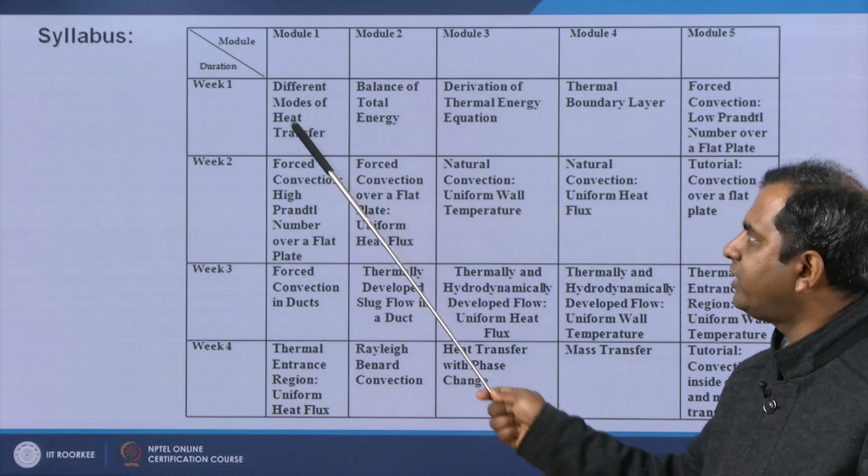Then immediately in the next lecture I will discuss how energy can be balanced, as it is convective heat transfer, so energy is very important. I will show you how energy balance can be done and what is the governing equation for energy conservation. Then, in week 1 module 3, I will show you how the energy equation can be written in different forms, especially CP form, CV form, all these specific heat forms.

Then in this week we will give you the idea of thermal boundary layer. This is nothing but flow over a flat plate, and if the plate has a higher temperature compared to the free stream temperature of the incoming flow, then we will have a concept of boundary layer development, just like the hydrodynamic boundary layer. This boundary layer we will call the thermal boundary layer, discussed in module 4.

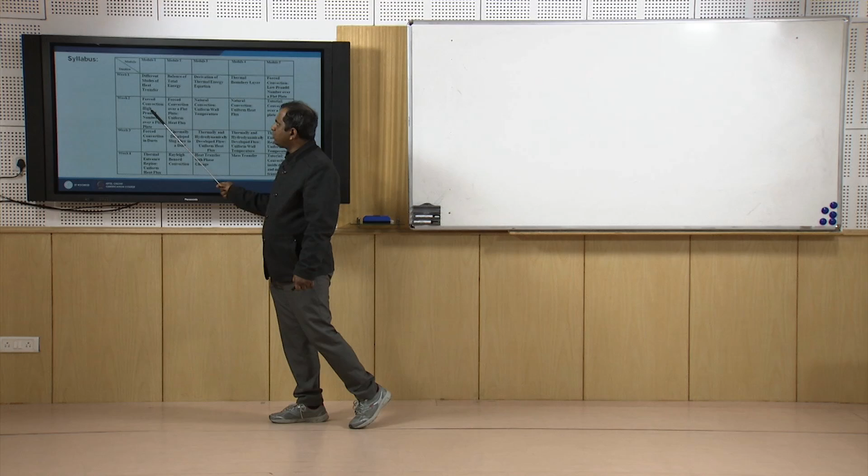In this week's last module we will keep forced convection, with predominant flow over a flat plate. In this lecture we will discuss the extreme limit of low Prandtl number. Immediately in the next lecture, week 2 module 1, we will discuss the high Prandtl number extent. These two will discuss more or less the same phenomenon, but at two different extents.

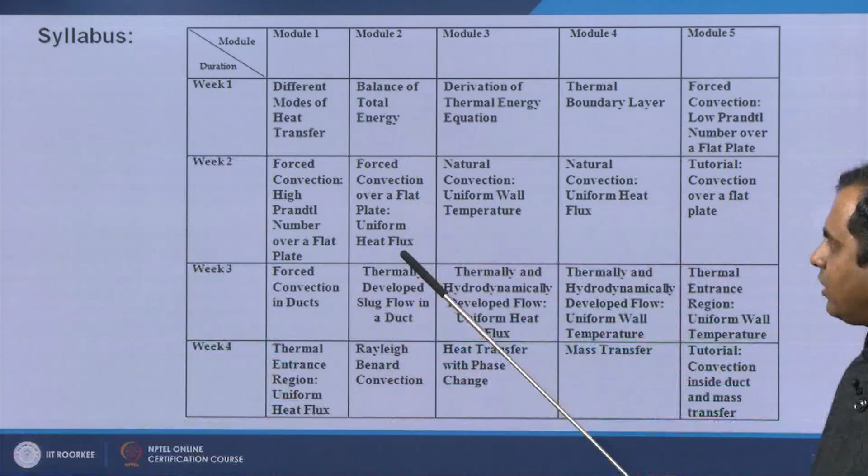Then we will go to another analogous case, uniform heat flux of the plate. In the previous two cases we had constant temperature, but here we will have uniform heat flux supplied by the plate. We will see this case coming up.

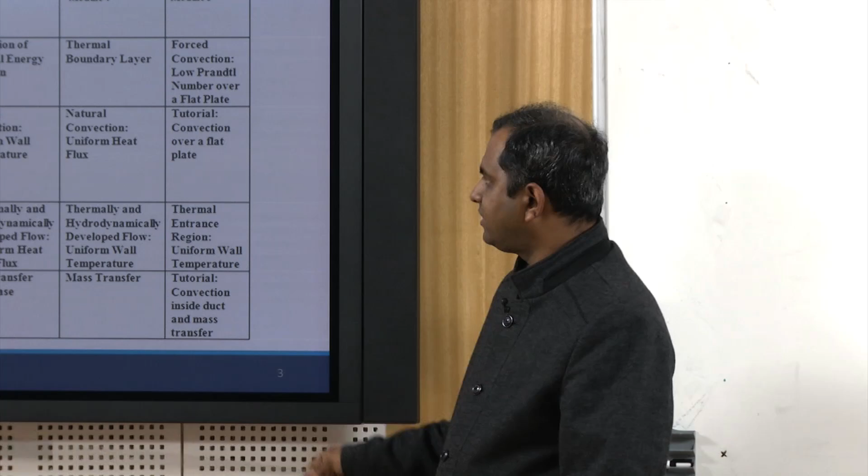In the second week we will briefly see what is natural convection, and we will see two different extents of natural convection: uniform wall temperature and uniform heat flux. At the end of this week we will do some tutorials on convection over a flat plate, covering numerical problems from all these lectures.

In week 3 we will move towards flow inside a channel, an internal flow situation, unlike the previous flow on a flat plate which was external flow. Here we will see forced convection inside a duct, internal flow. Then in that week we will continue with thermally developed slug flow, discussing what slug flow is and what thermal development means. This will be covered in the second module of week 3.

In the third module we will see thermally and hydrodynamically developed flow, considering first the uniform heat flux case in module 3, and in module 4 the uniform wall temperature case. At the end of week 3, in module 5, we will see another extent called the thermal entrance region.

This is the beginning section of the duct for convective heat transfer. We will define what the entrance region is, and then learn the governing equations and different non-dimensional numbers for the uniform wall temperature case.

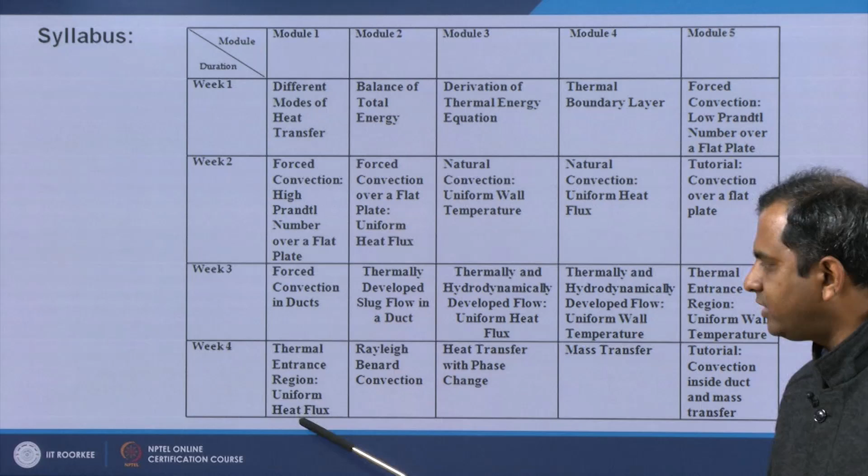In the last week, at the beginning, we will continue and see the same case, thermal entrance region, but for the uniform heat flux case.

In this week's second module, we will see a special type of convection called Rayleigh-Bénard convection. Here we will see that when we have two parallel plates, how convection cells form in between, and how that can be analyzed using the governing equations and boundary conditions respectively.

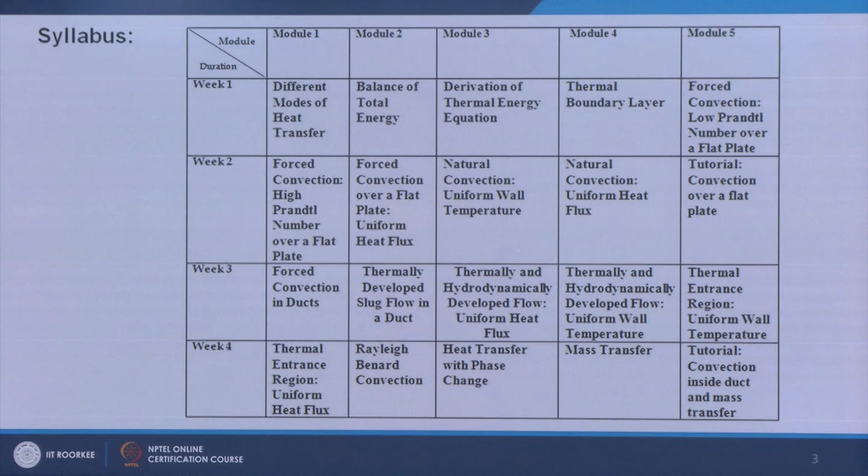Then we will see two special cases related to convection. The first is heat transfer with phase change. I will show you how phase change can be linked up with convection. Phase change here means only boiling and condensation; in other cases convection will not be that much involved.

We will see boiling and condensation cases, and then mass transfer, which is more or less analogous to convective heat transfer. This lecture will be very much related to chemical engineering students.

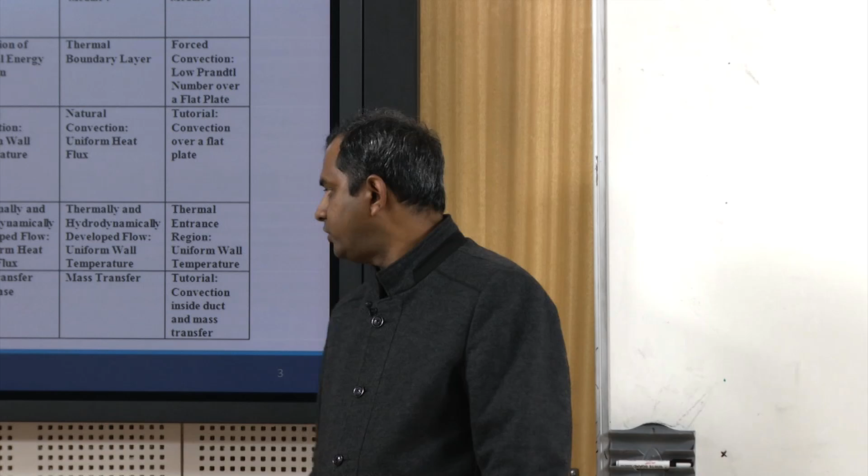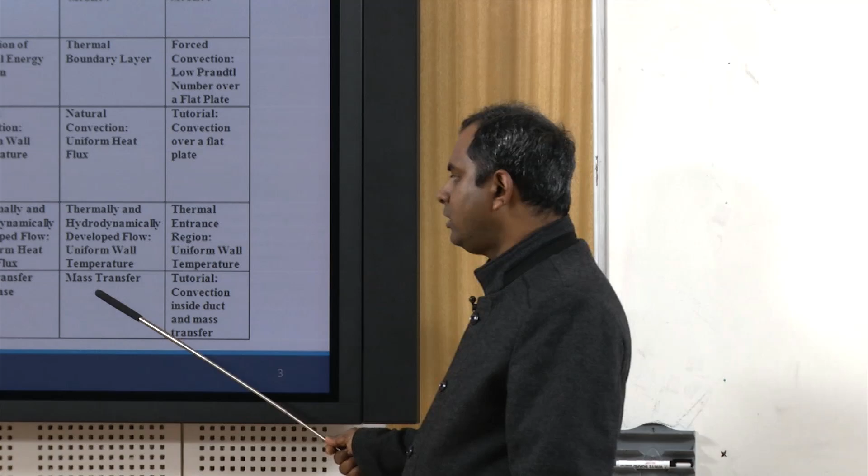At the end of this lecture we will do some tutorials again, specially concentrating on convection inside a duct and some problems on mass transfer. With this, I will be ending this course.

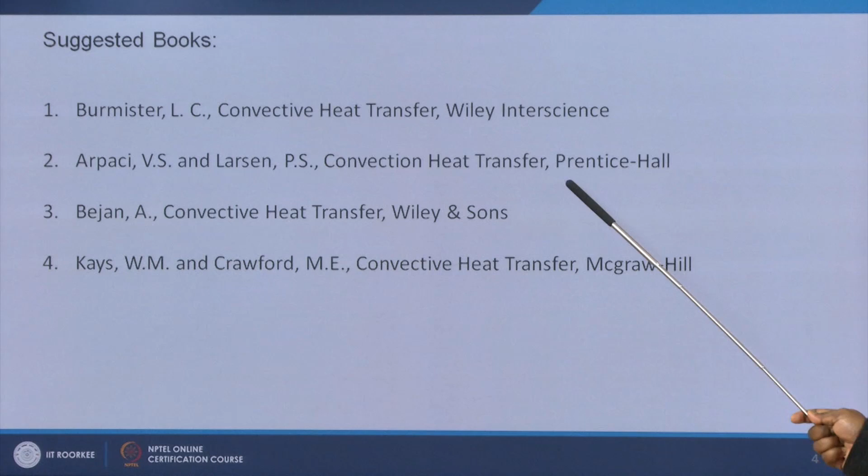A very good book is by Burmister, L.C. Burmister, titled Convective Heat Transfer, published by Wiley InterScience. We have some more books: one is by Arpaci and Larsen, V.S. Arpaci and P.S. Larsen, titled Convection Heat Transfer, available with Prentice Hall publisher. Then there's also a very good book by Adrian Bejan, Convective Heat Transfer, published by Wiley and Sons.

You can also refer to Kays and Crawford, W.M. Kays and M.E. Crawford, once again titled Convective Heat Transfer, available with McGraw-Hill publisher. All these books are very nice; if you want, you can consult these books along with this course.

Let me go to the outline of what we are going to discuss in this lecture. We will learn about the basics and applications of heat transfer. As we are beginning the course, we have to learn the very preliminary basics and applications. Then we will go for classification of heat transfer and learn the different modes, as well as discuss the governing laws.

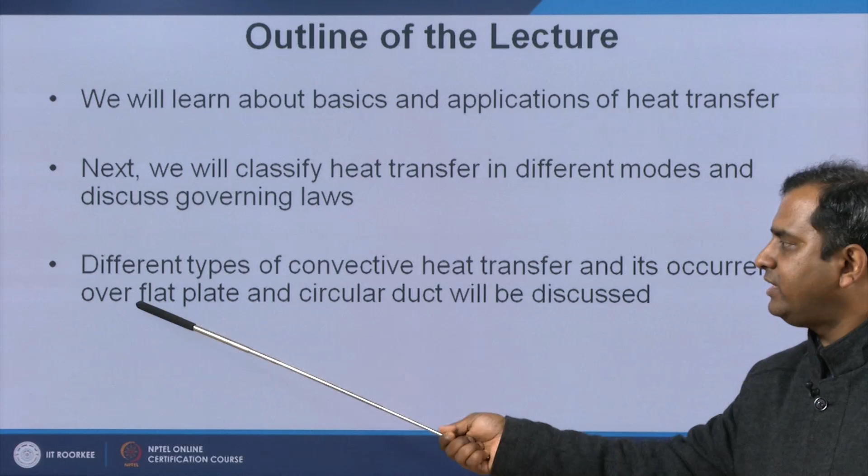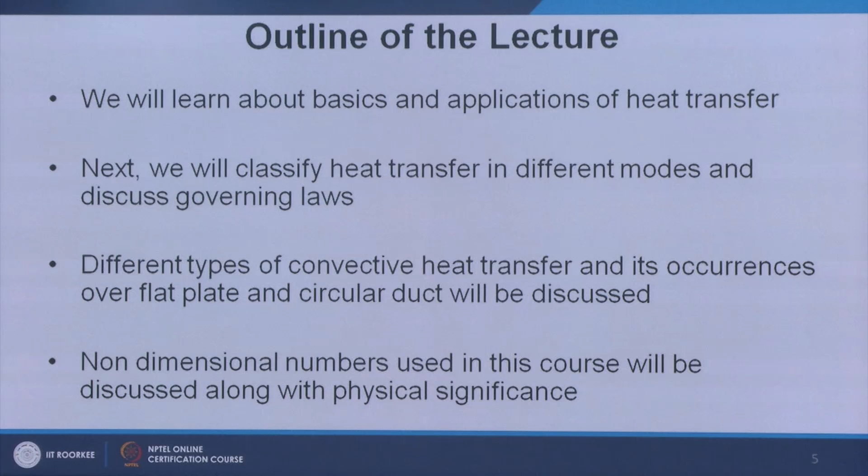Then we will be seeing what are the different types of convective heat transfer available and its occurrence over flat plate and circular duct. The first 9 lectures we will be having flat plate and then rest of the lectures we will be having circular duct. These two cases we need to understand in this lecture, and then finally I will be giving you different non-dimensional numbers which will be important for convective heat transfer. I will also be telling you the physical significance of those numbers. So let us go inside.

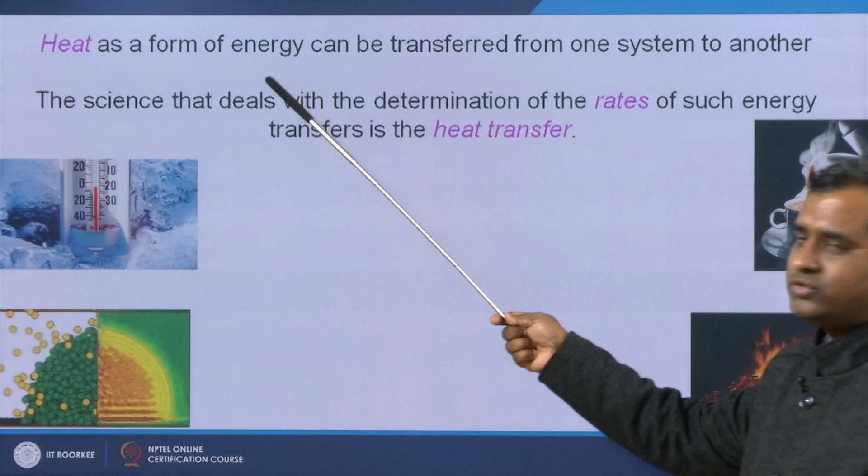First let me tell you what is heat. Heat is nothing but a form of energy which can be transferred from one system to another system. So this is actually energy, nothing but energy. Now, the science which deals with the determination of rates of such energy transfer is called heat transfer. So to know the energy transfer, we have a subject called heat transfer.

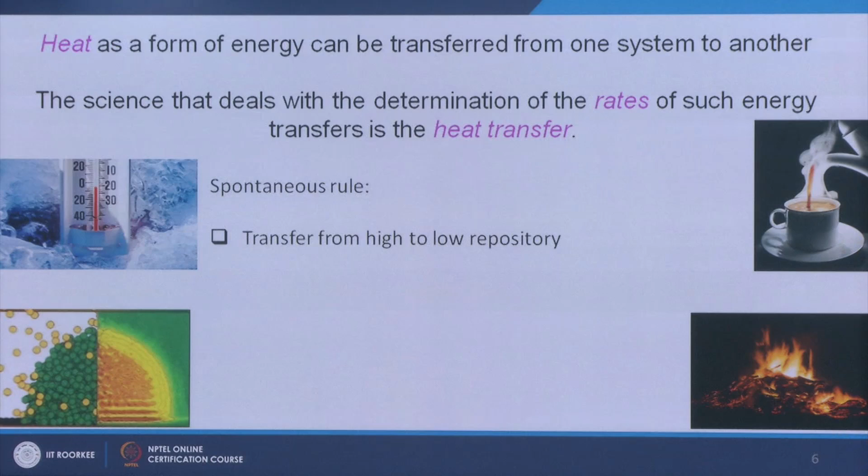Here I have shown two extents of heat: a very hot object like fire or a cup of tea where you can see vapor coming out, and on the other side ice, having temperature less than 0 degree centigrade. So we are having a spontaneous rule for transfer of heat from one side to another. The rule is always heat transfers spontaneously from a high repository to a low repository. The repository is characterized by a term called temperature, which you have already learnt in thermodynamics. The high temperature repository is called source and the low temperature repository is called sink.

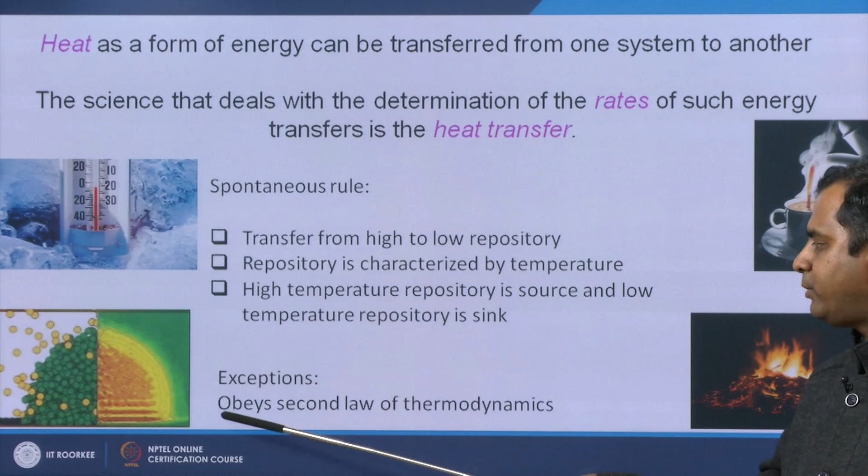These are the spontaneous rules that heat transfer follows. Now, there are exceptions also. If you are having exceptions, we call those different heat transfer devices. In those devices we have to obey the second law of thermodynamics. From your thermodynamics knowledge, you already know how heat transfer can be regulated using the second law of thermodynamics.

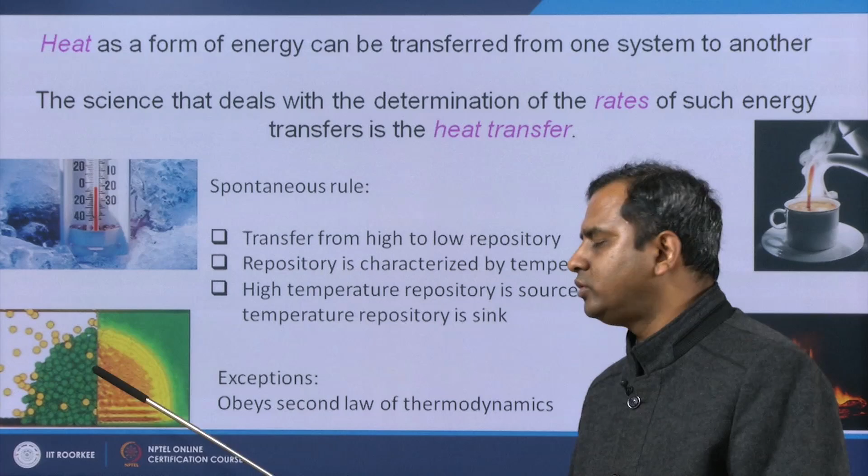Here I have shown some molecular structure of vapor and liquid. Over here the molecules are very much compact, but here molecules are flying away. So here we have higher temperature to have these agitations, and here we have lower temperature to have the compactness. So temperature difference, or convection, actually determines whatever phases will be there. In this subject we will also be discussing about phase change, which will be important. Till now whatever we have shown is related to single phase things only, but phase change can also come with convection.

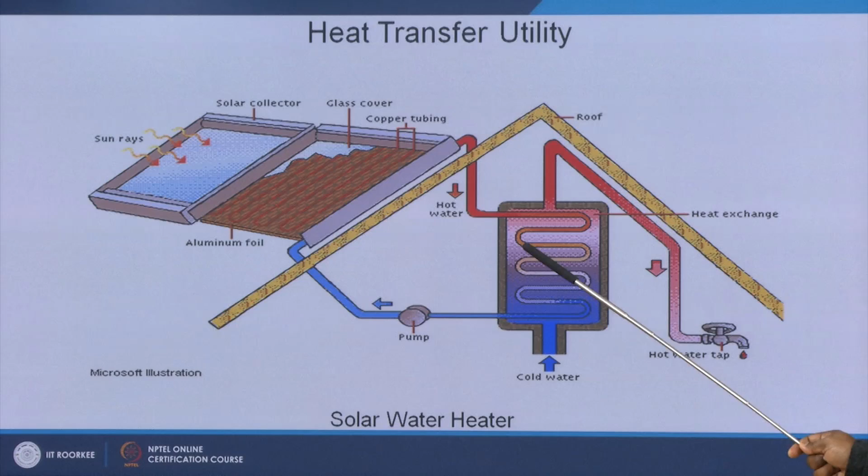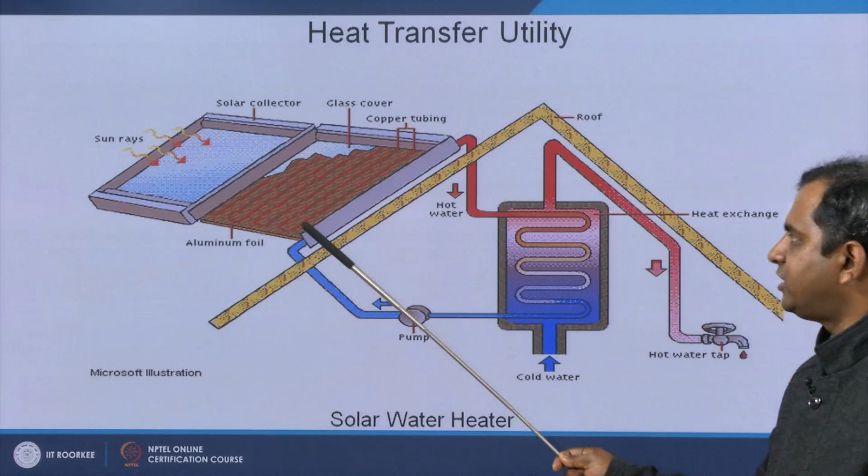Next let me show you some utility. There are multiple utilities, but here I have named a few to save time. First is solar water heater. Let us say this is the roof of a house. At the roof you can have this type of solar collector, and solar rays come over here through the copper tubing carrying hot water, and this is the manifold which gathers all the water and supplies hot water for different purposes. For example, a hot water tap can be there, there can be a hot water heat exchanger through which the room becomes hot, and finally this pump can give back the cold water after heat transfer, back to the solar chamber. So here the whole phenomenon is driven by heat transfer. Heat is being transferred here, inside the room heat is being transferred, and once it has gone back it is once again ready for new heat transfer stages. So solar water heater is a perfect example of heat transfer utility.

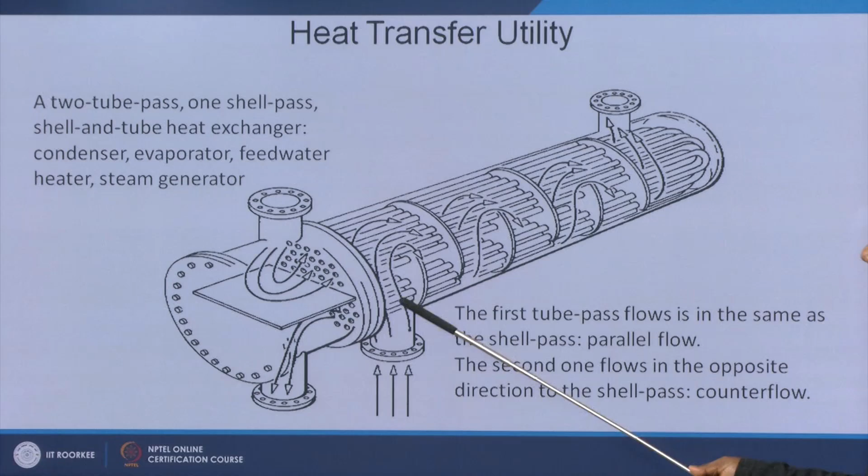Next, a 2 tube pass, 1 shell pass, shell and tube heat exchanger. Heat exchangers are devices where we deal with exchange of heat from one phase to another phase, so obviously heat transfer will be important there. Some devices we call condenser, evaporator, these are there in air conditioning and refrigeration units. You can even find condensers in power plants. In a power plant we can also have feed water heaters and steam generators or boilers. So all these are heat transfer utilities. Here I have shown a schematic of a shell and tube heat exchanger. You can see all these tubes, and we have flow of another fluid via this inlet and exit to have some sort of heat exchange between the fluids.

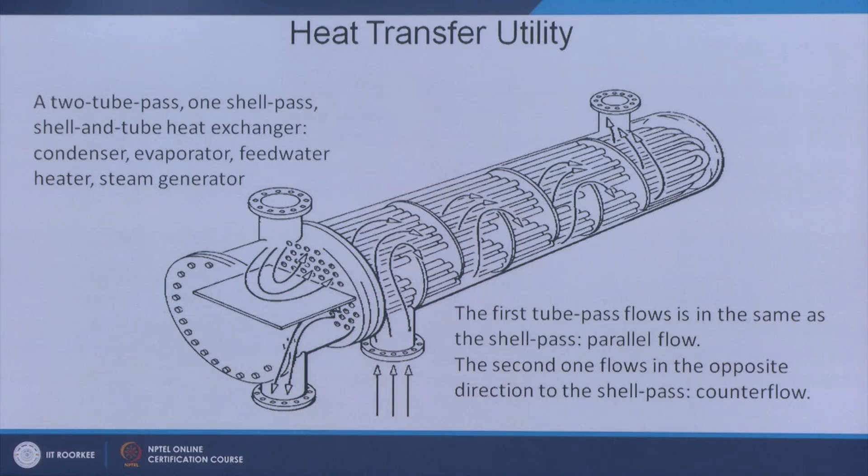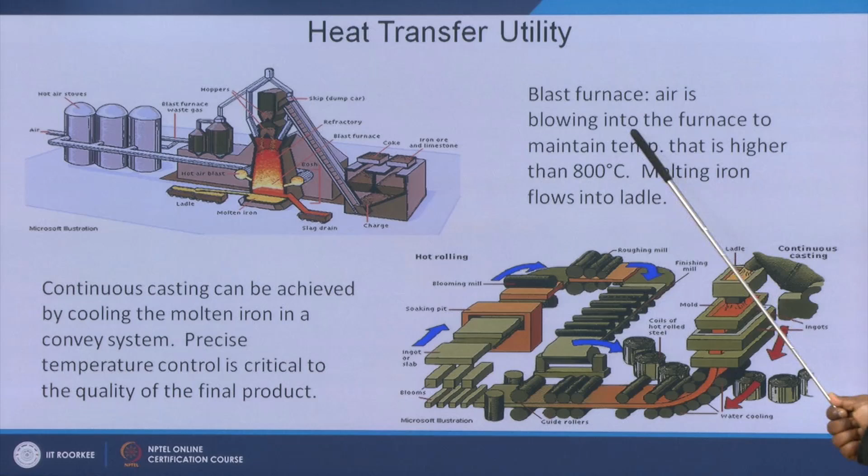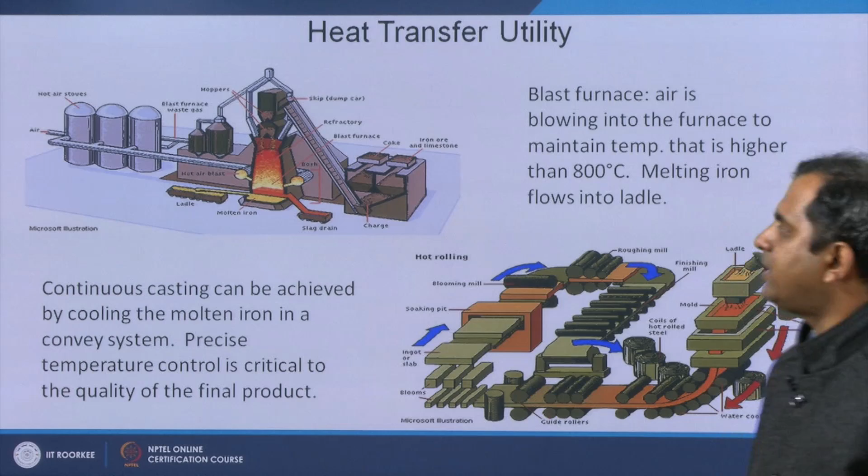Another example is this figure - a blast furnace, where air is blown into the furnace to maintain temperature higher than 800 degrees centigrade. This is required for melting iron. Here iron is being melted and flowing into the ladle for casting somewhere else. This blast furnace is a perfect example of heat transfer utility.

As the ladle is carried out, it will be used for casting later on. Casting is giving form to your desired shape, which is very important in manufacturing. This is an example of a continuous casting machine, achieved by cooling the molten metal and giving it a desired shape in a conveyor system. Precise temperature control is critical for the quality of the final product, so heat transfer takes a major role here.

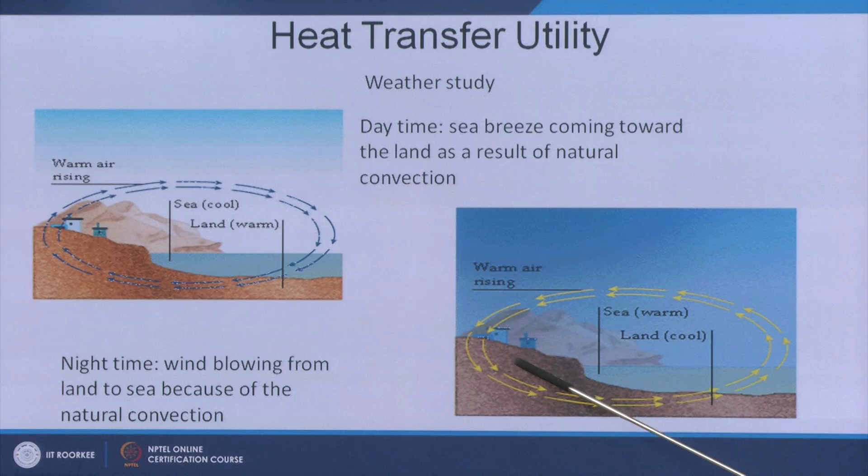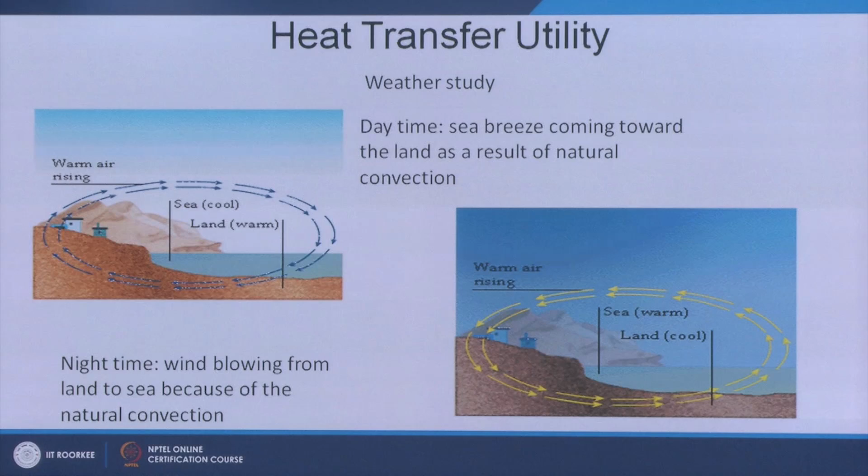Apart from this, in our earth we can have weather study. During daytime the sea breeze comes towards the land, and this is a result of natural convection. At night time the wind blows from the land to the sea, which is also due to natural convection. So our weather changes by virtue of heat transfer - this is also a perfect example of heat transfer utility.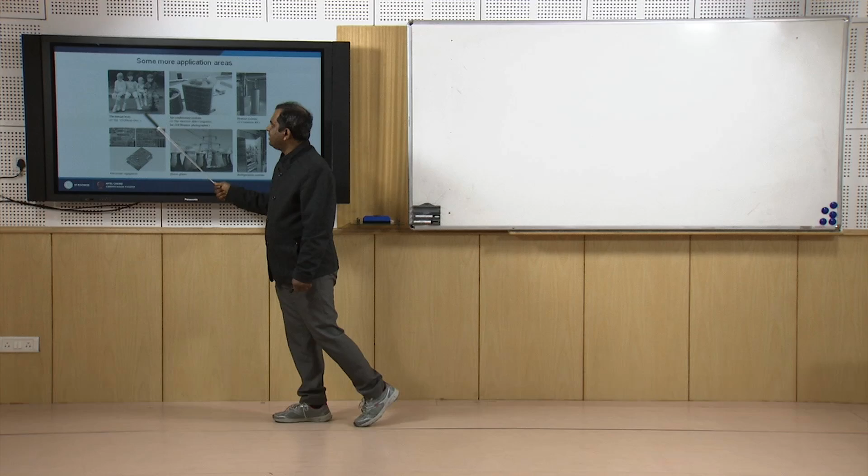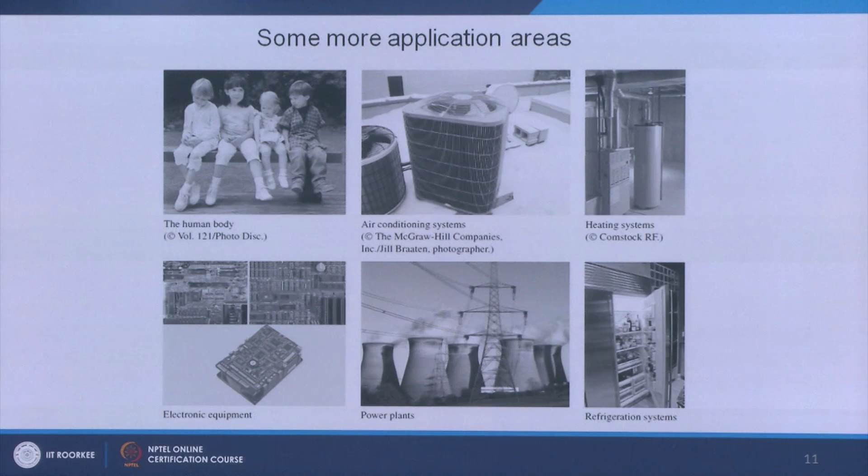Apart from this, there are various other examples, I am not mentioning all. Even our human body has heat transfer utility. Air conditioning systems, heating systems used in cold countries, electronic component cooling - all laptops, PCs, cameras and smartphones have these heat transfer equipments. We have power generation in power plants, and refrigeration systems also have the concept of heat transfer. There are many more examples. It is a very interesting subject to learn heat transfer.

First let me show you the different modes of heat transfer. Basically we have three different modes: conduction, convection and radiation.

Let me give a small example of heat transfer. Let us say this is a fire or heat source. If you try to take the heat via an iron rod and touch the rod, you can see that this side of the rod has a very high temperature and this side has a very low temperature. Through the solid, heat transfers, which is nothing but conduction.

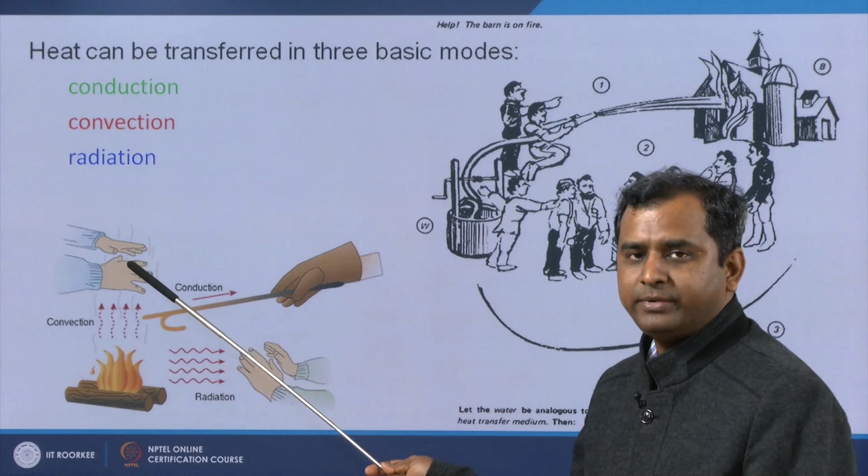If heat is transferred via air, there is predominant motion of the medium to transfer the heat from high temperature to low temperature side - that is convection. On the other hand, if heat comes a significant distance without disturbing the medium, that is called radiation. For radiation, the medium is not involved, so heat can be absorbed from a very high distance. But for convection you have to keep a certain distance so heat can be taken from high temperature to low temperature.

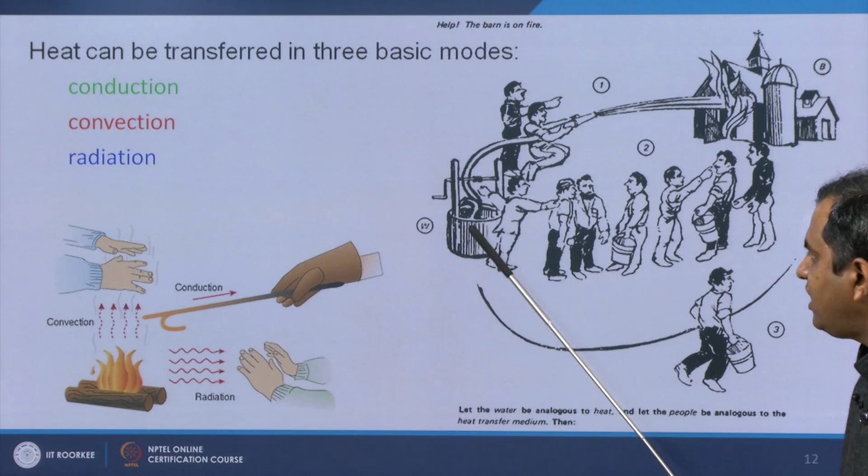To explain this, I have given a small story. Let us say we have a house which is burning, so we have to extinguish the fire. Here we have a water well with water in it. My task is to take the water to extinguish the fire in the house. You can call this a high temperature source and this a low temperature source. We need a transfer of water, or analogously heat, from high temperature to low temperature.

Now let us see the different modes. What the inmates of this house can do is take a bucket, pick up water from the well, run to the house, and throw the water to extinguish the fire. This is the first mode, where the person is running the distance between the well and the house.

Another way is that all the inmates form a human chain, starting from the well to the house, and the bucket is being filled up by the person nearest to the well. After filling the bucket, he transfers it to the next person, and so on, until the bucket reaches the person nearest to the house, who is responsible for throwing the water onto the house. Here the persons are not moving; the bucket is shifting from one person to another, so there is no predominant motion of the persons.

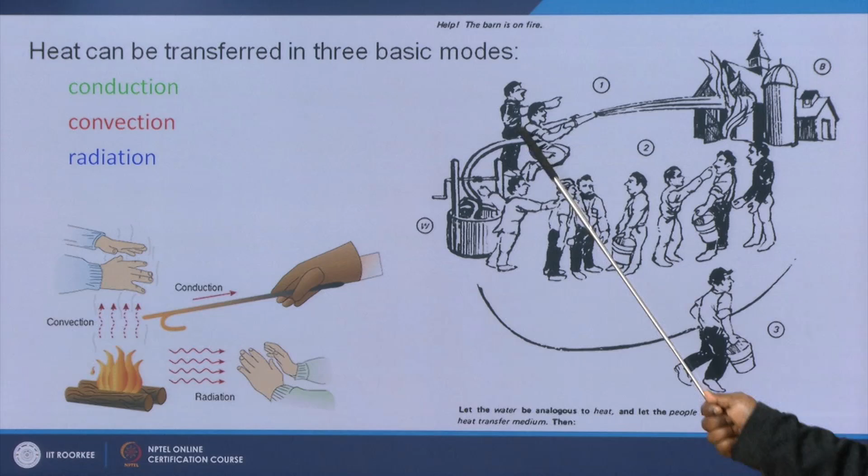The third one, let us say they are a fire extinguisher company. They have taken a hose, and without movement, they use some other mechanism, pumps or something like that, to throw water onto the house, taking water from the well.

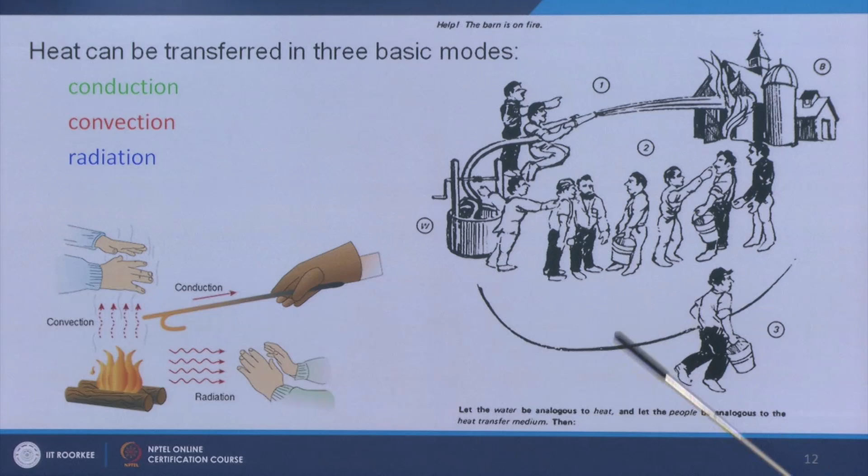Now if you consider these three cases of transfer of water from the well to the house: the first has predominant motion of the person, which is comparable to convection. The second, where persons only take the bucket and pass it to the next person, is analogous to conduction, since there is no predominant motion of the medium. The third, where the medium is no longer required and some other mechanism pumps the water to extinguish the fire, is analogous to radiation. So all three modes have been shown using this example.

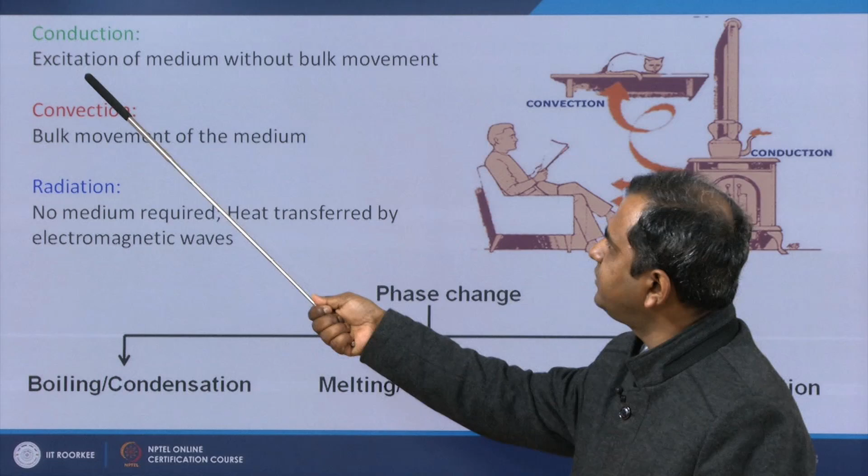Next, let me tell you definitely about conduction, convection and radiation. Conduction is excitation of the medium without bulk movement. Here you can see a fire pot with a kettle over it; heat is being transferred from the fire pot to the kettle via the solid, without bulk movement. This is a perfect example of conduction.

Convection requires bulk movement of the medium. This person is getting heat via convection: air is moving like this, and the cat is getting heat via convection too. It cannot see the fire, but via the air it is getting the heat. On the other hand, no medium is required for heat transfer via radiation. If they can see each other, no medium is required; the person can directly take heat from the fire. So these three modes can be explained from this small fire pot example.

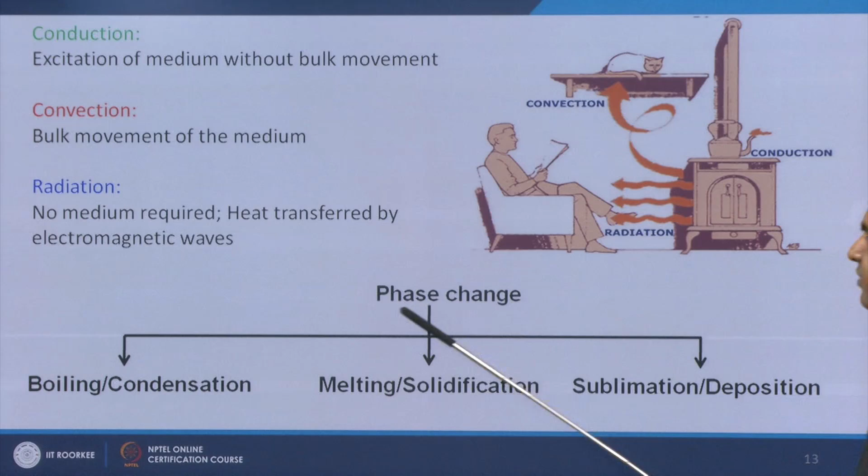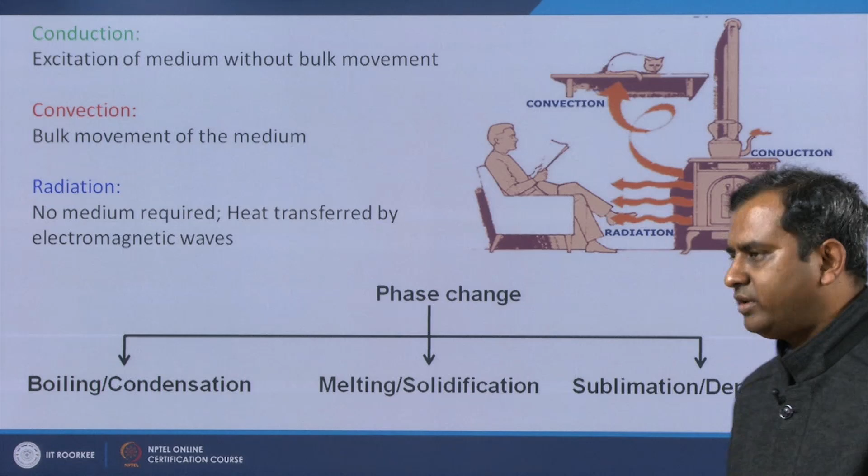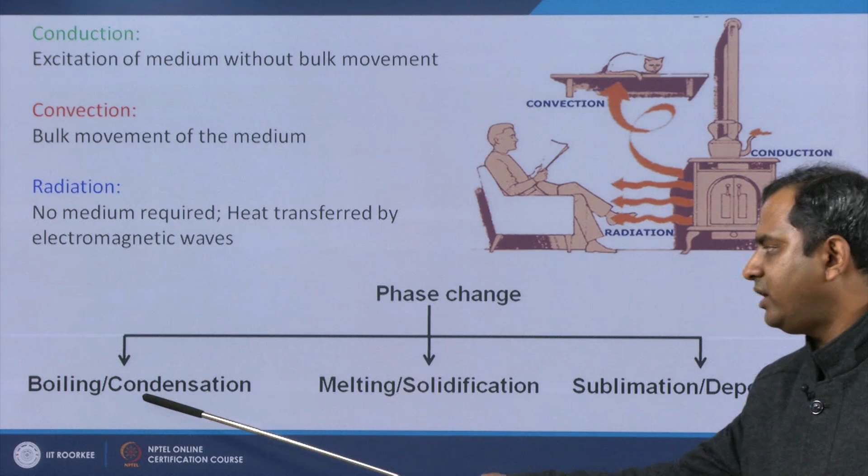Apart from these three modes of heat transfer, we also have phase change. These are all single phase heat transfer modes. In phase change, we can have boiling and condensation for the gas-liquid domain, melting and solidification for the liquid-solid domain, and sublimation and deposition for the gas-solid domain. In convection, our interest lies mainly in the zone where gas and liquid are involved, so boiling and condensation. Some convection can also be seen in the other two domains, but majority of the time convection occurs in the lighter phase, so we will concentrate on this one. Next, let us go one by one through the different modes.

The first mode is conduction. Let us say we have two planes: one plane at temperature TH and the opposite plane at temperature TC. Since TH is high temperature and TC is low temperature, heat will spontaneously transfer from the high temperature side to the low temperature side. So we can write the heat transfer Q through this slab as proportional to TH minus TC, which is the temperature difference between the planes. If TH minus TC increases, the heat transfer will also increase.

We have also found that if the length of the gap between the plates decreases, the heat transfer rate will increase. So L is inversely proportional to the heat transfer rate, delta Q by delta t. Also, if the area increases—this being the surface area of the plates, both plates having the same surface area in this example—then the heat transfer rate will increase.

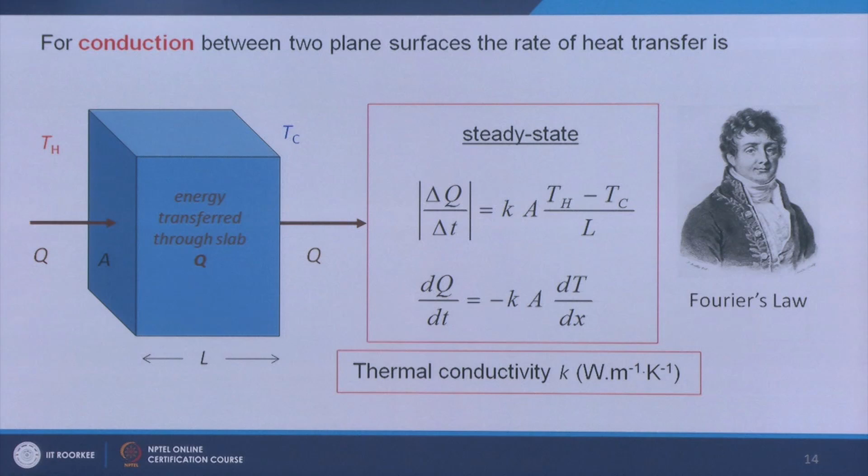So we get that del Q by del T, heat transfer with respect to time, is proportional to A, proportional to Th minus Tc, and proportional to 1 by L. We give the constant here as K, and K we call thermal conductivity. The unit of thermal conductivity is watt per meter Kelvin. This famous law has been given by Fourier, so we call this Fourier's law.

Next, let's find out what thermal conductivity is. This is actually a property of material. Diamond has very high thermal conductivity, whereas air has very low thermal conductivity. So air can be used for insulation purposes, as well as different woolen clothing which has low thermal conductivity.

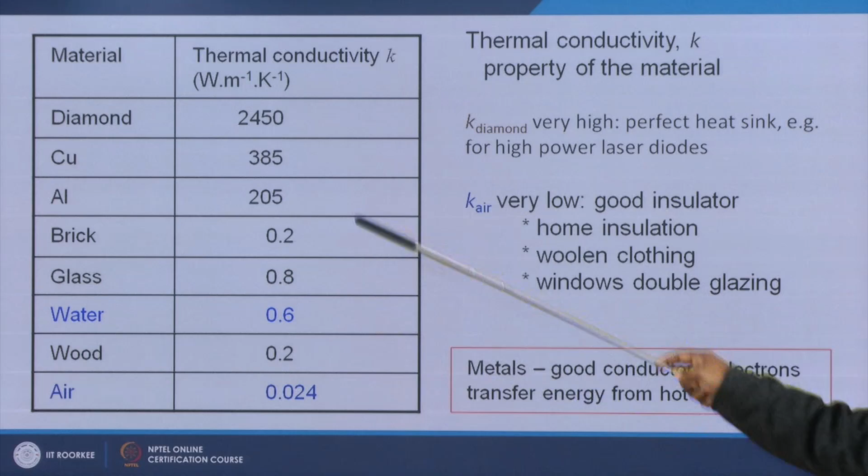For window glazing we can use air for its low thermal conductivity, which acts as a very good insulator. Some values of thermal conductivity are in this table. Air has a very low value of 0.024, whereas diamond has a very high value of 2450. Metals are good conductors, and electrons transfer energy from hot to cold. In conduction, electrons become agitated and transfer energy from one molecule to another, so electron transfer becomes important for the conduction mode.

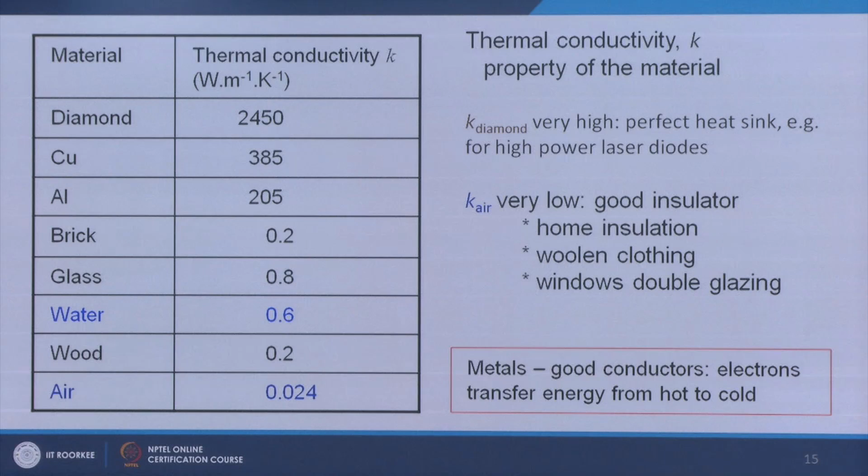Let us see the next mode, which is very important for us: convection. For this we will understand Newton's law of cooling, given by Sir Isaac Newton. He said that if you have a hot block of temperature T1, and it is open to a free stream of air of temperature T2...

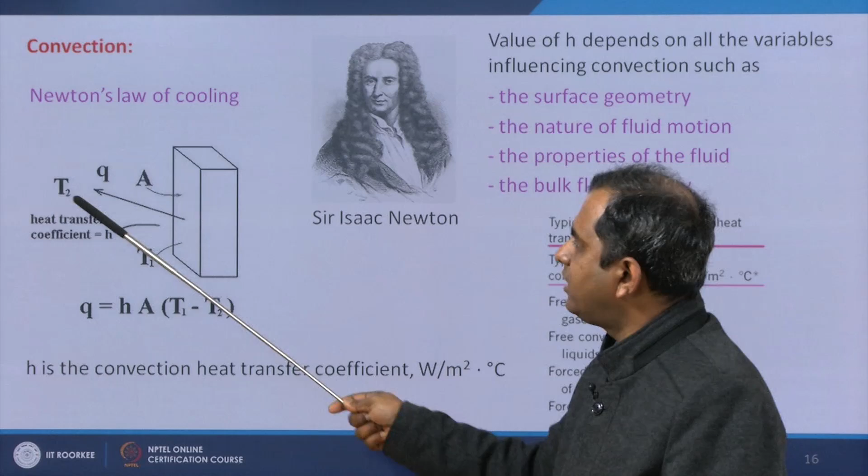...there will be heat transfer from this hot block to the air at temperature T2, and that heat transfer will be proportional to T1 minus T2, the temperature difference between the block and the neighboring air. He also said area is very important; if area increases, heat transfer increases. So Q is proportional to A and Q is proportional to T1 minus T2.

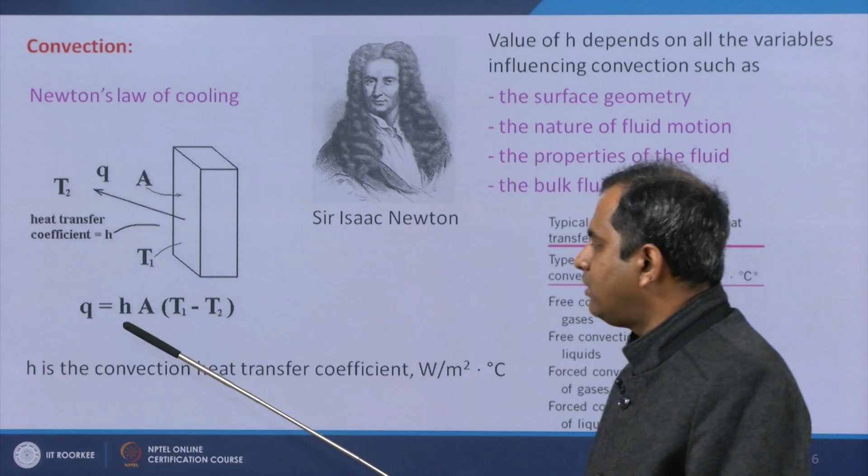If we give the constant, we call it H, the convective heat transfer coefficient. We will do a detailed discussion about convective heat transfer coefficient in this course. Its unit is watt per meter square Kelvin, or watt per meter square degree centigrade. Some examples of convective heat transfer coefficient are given here.

Quickly, let me introduce free convection and forced convection. For gases and liquids, convective heat transfer varies. Free convection for gases has a very low convective heat transfer coefficient, whereas forced convection for liquids has a very high convective heat transfer coefficient. Forced convection heat transfer coefficient definitely depends on the velocity of the fluid, so Reynolds number becomes important.

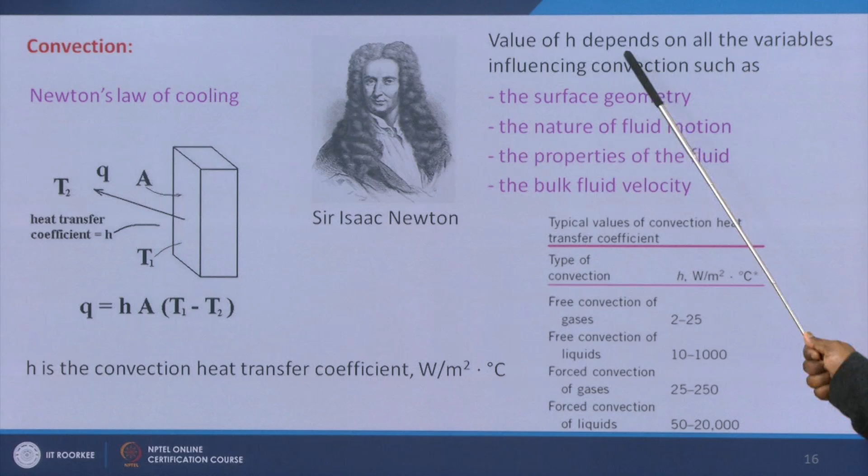The value of H depends on the geometry of the surface, the nature of the fluid, the properties of the fluid, and definitely the velocity. Next, let us see the different types of convection available: forced convection and free convection, also called natural convection - both free and natural are the same thing.

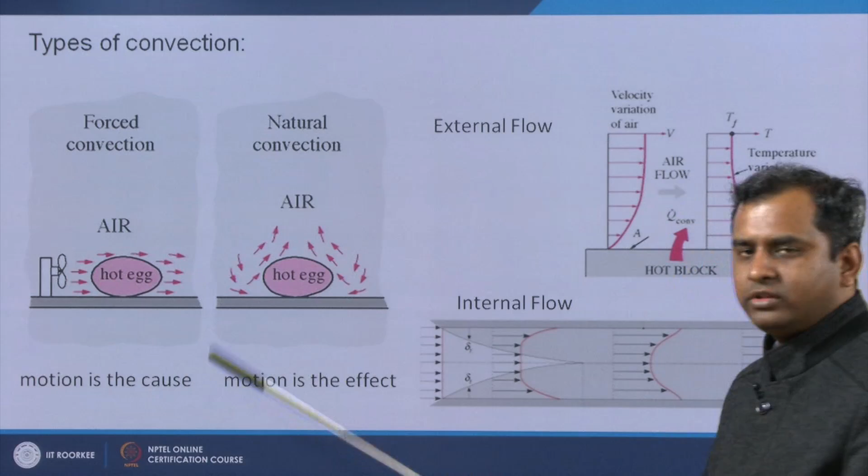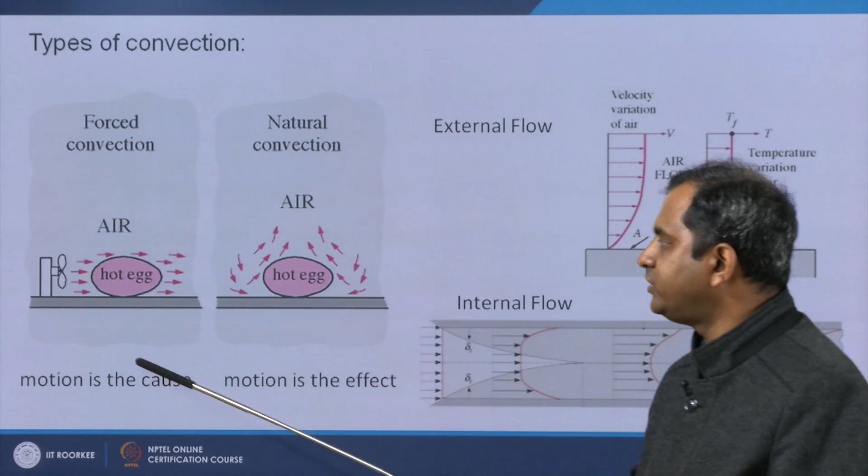Here you see a hot egg which we want to cool down by airflow. In the first case, we used a small fan to blow air on the hot egg. Here the air has some predominant motion generated by the fan, so motion is the cause which is causing the convection. This is a forced convection situation.

On the other hand, if you just keep the hot egg in normal air, the air near it will take the heat and move up, and subsequently higher density air will come in contact with the hot egg. This type of convection cell will always be generated, taking away the heat.

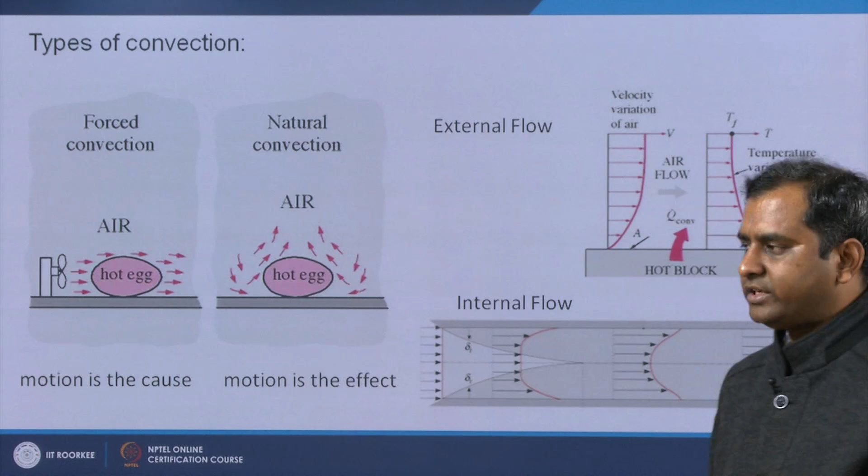This mode is called natural convection. Here the motion of the air is actually the effect of heat transfer, whereas in forced convection the motion is causing the heat transfer. So this is the basic difference between forced convection and natural convection.

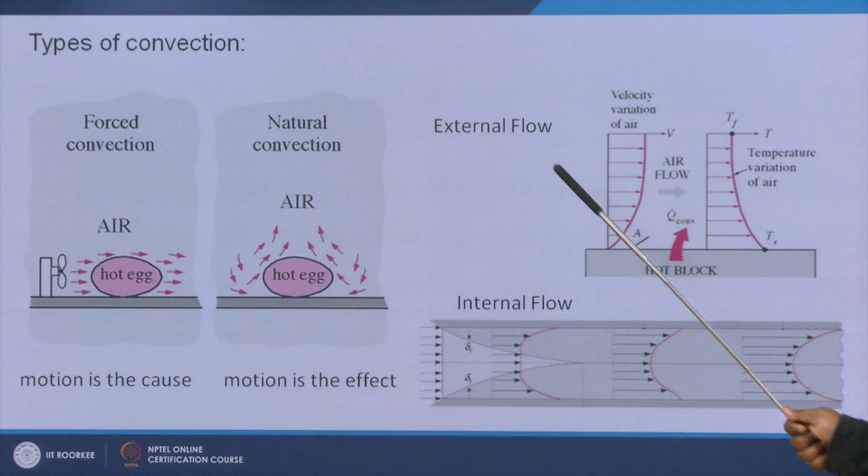In this course we will also be seeing internal flow and external flow. Internal flow is flow inside a duct. The duct can be a pipe, a rectangular pipe, a triangular pipe, or some other cross section. External flow is whenever there is flow over an open plate. Let us say this is a plate fixed like this in the free stream, and here you have some velocity.

From fluid mechanics, you know there will be one velocity boundary layer, and the velocity profile will be like this. Here also, in case of internal flow, there will be a parabolic velocity profile. In case of energy, thermal energy, or convection, we will find a temperature profile like this. We will discuss this in detail in due course. In internal flow, the temperature profile will look like this, and finally it will come like that. Some terminologies are involved, called thermal entrance length and so on, which we will discuss with internal flow in this course.

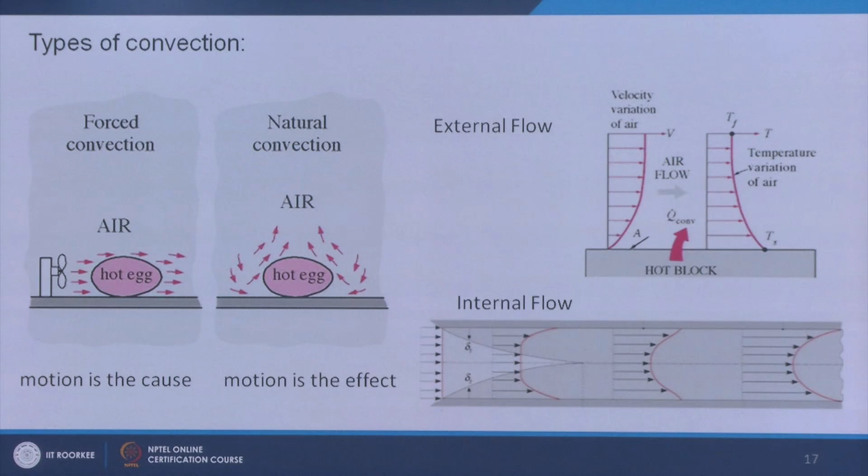After this introduction to different types of convection, let us see what is radiation, the third mode. In case of radiation, this was proposed by Stefan and Boltzmann, which is why it is called the Stefan-Boltzmann law. They proposed that emission heat transfer from a hot body is proportional to the surface area of the body, As, and proportional to the fourth power of the temperature of the body.

So they proposed Q is proportional to A, and Q is proportional to T to the power 4. Once you introduce the constant, called the Stefan-Boltzmann constant, its value sigma is found to be 5.67 into 10 to the power minus 8 watt per meter square Kelvin to the power 4. This is very important.

So usually we call this the black body. In case of a black body, it is an idealized surface which emits radiation at the maximum. So a black body can emit radiation at the maximum. If we think about black bodies, the sun is a perfect example of one, since it emits the maximum.

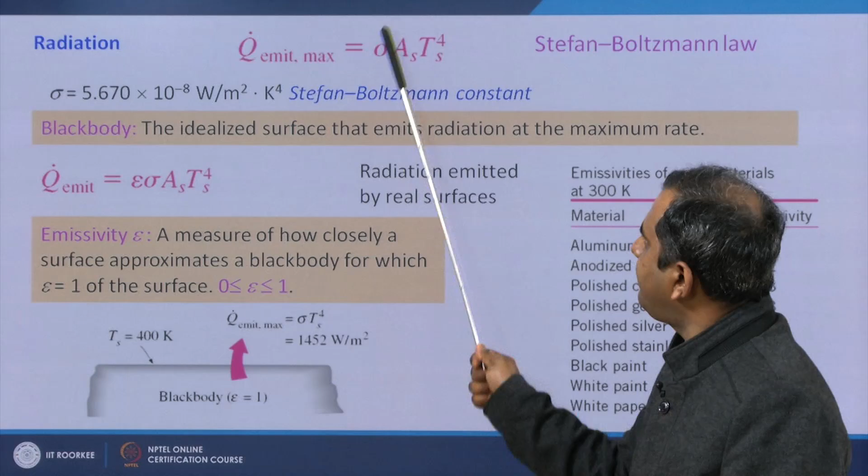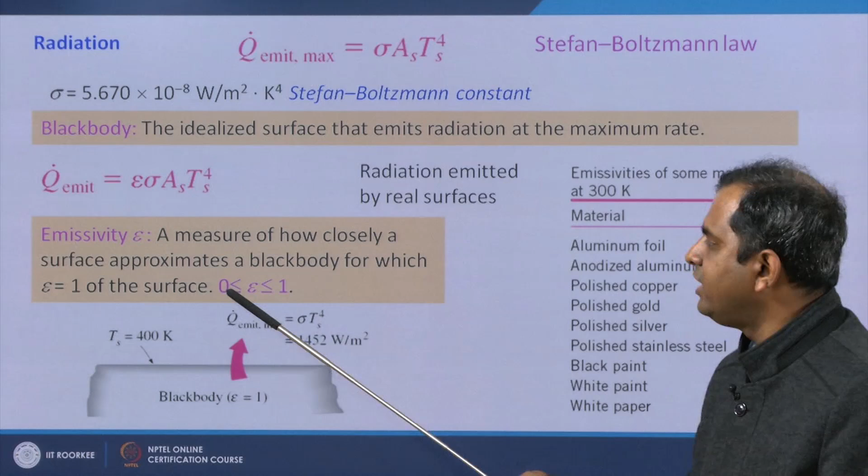Now for real surfaces which are not a black body, we find that some fraction of this maximum possible emission is actually obtained. So we give this coefficient epsilon, which is emissivity. The value of emissivity is between 0 and 1. If it is 1, then it becomes the black body, and this equation converts into that simpler form.

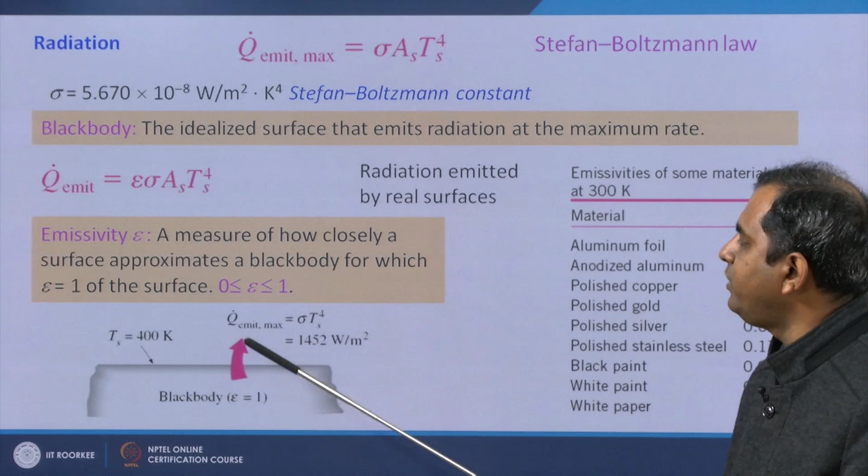Here I have given an example. If the body has a temperature of 400 Kelvin, the Q emission, using the value of sigma, comes out to be 1452 watt per meter square. Here Q dot is per unit area, so I have considered the area as 1. Remember, you need to put the temperature in Kelvin.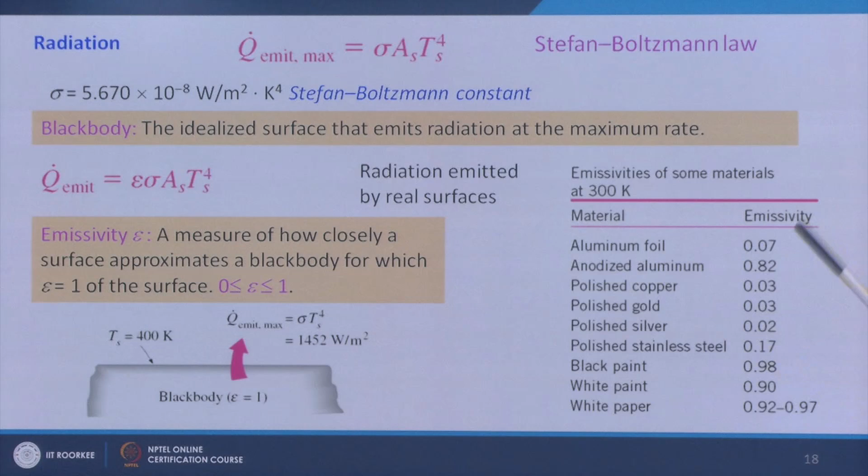Next, some emissivities, which are between 0 and 1, I have mentioned for different materials, starting from aluminum foil and white paper. White paper has very good emissivity, almost near to black body. Black paint also has very good emissivity.

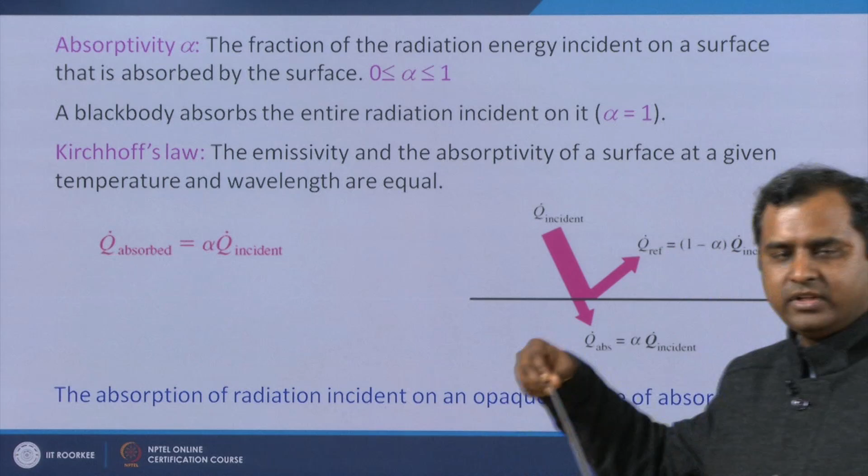Another factor is absorptivity. Just like emission, any material can also absorb emissions. So the fraction of radiation energy incident on the surface that is absorbed by the surface is called the absorptivity. Its value is also between 0 and 1. A perfect black body absorbs everything—it emits the highest and absorbs everything, so it has absorptivity equal to 1.

These two, absorptivity and emissivity, are related by Kirchhoff's law, which states that the emissivity and absorptivity of a surface at a given temperature and wavelength are equal—so alpha and epsilon are equal. Here I have given an idea of how emissions are absorbed: Q incident comes in, the alpha fraction, the absorptivity fraction of that emission, is absorbed, and the rest is reflected—so 1 minus alpha times Q is reflected.

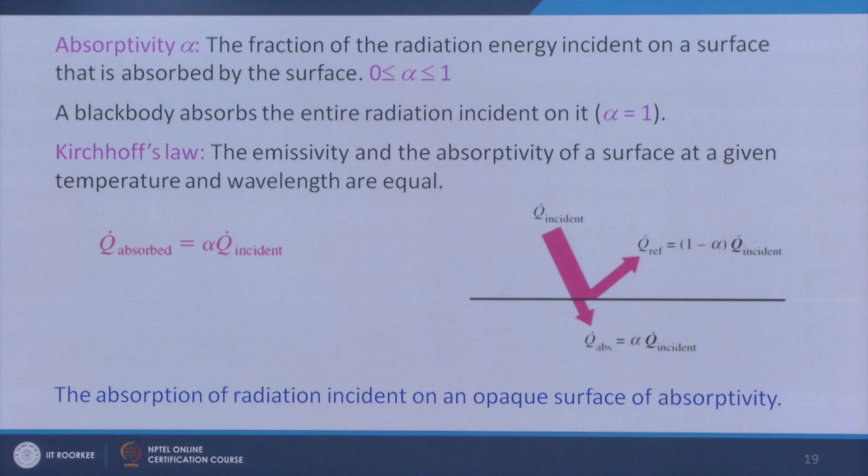So similarly there is another term called reflectivity. Reflectivity is nothing but 1 minus alpha.

After that let us see different non-dimensional numbers which we will be reading in this convection course. The first one is Biot number, this is nothing but HL by K, the ratio of internal thermal resistance of a solid to the boundary layer thermal resistance.

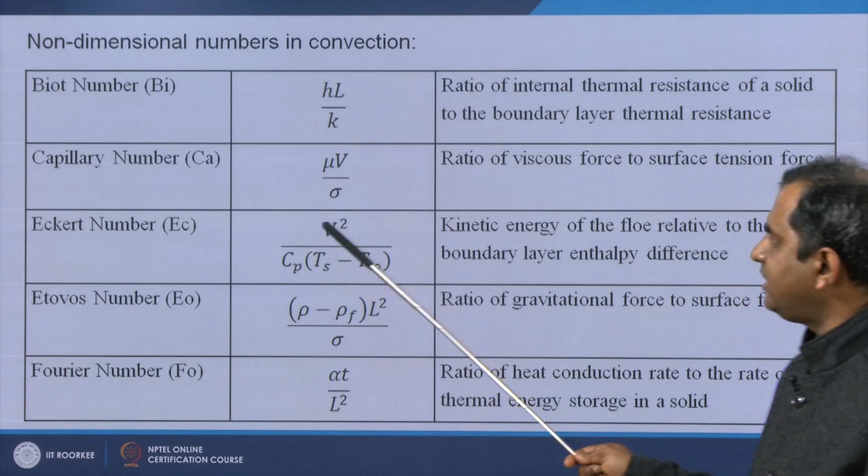Then capillary number Ca, mu V by sigma, ratio of viscous force to surface tension force. Eckert number Ec is nothing but V square by Cp into surface temperature minus free stream temperature.

It is actually kinetic energy of the flow relative to the boundary layer enthalpy difference. Eötvös number Eo is nothing but del rho into L square by sigma, this is actually gravitational force to surface tension force ratio.

Fourier number Fo is actually alpha T by L square, so it is actually the ratio of conduction heat rate to the rate of thermal energy storage. Whatever energy is being stored inside the solid, that is Fourier number.

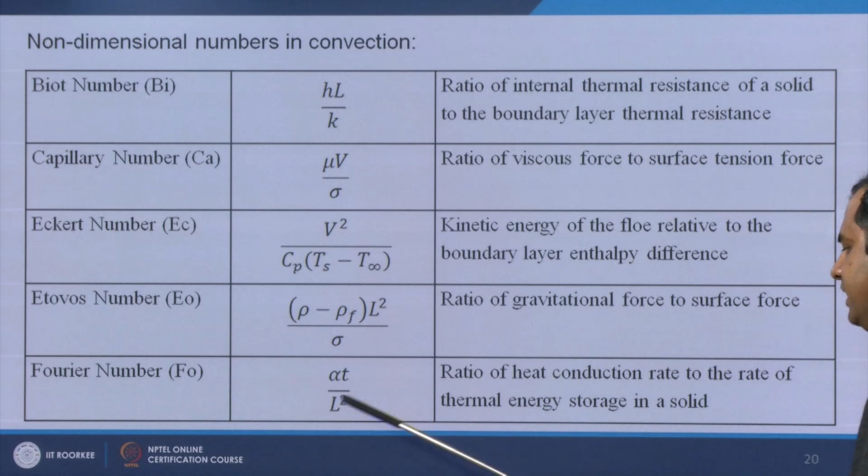Next we are having Graetz number. You see, Graetz number is nothing but the ratio of thermal capacity to convective heat transfer, m dot Cp by KL.

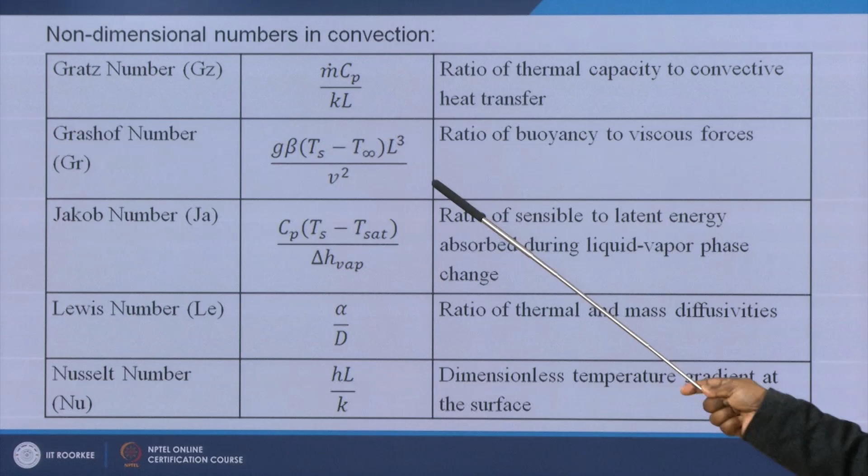Grashof number will be important, Gr, for natural convection. g beta delta T, Ts minus T infinity is the temperature gradient between the hot surface and the ambient, into L cube by nu square, the ratio between buoyancy and viscous force.

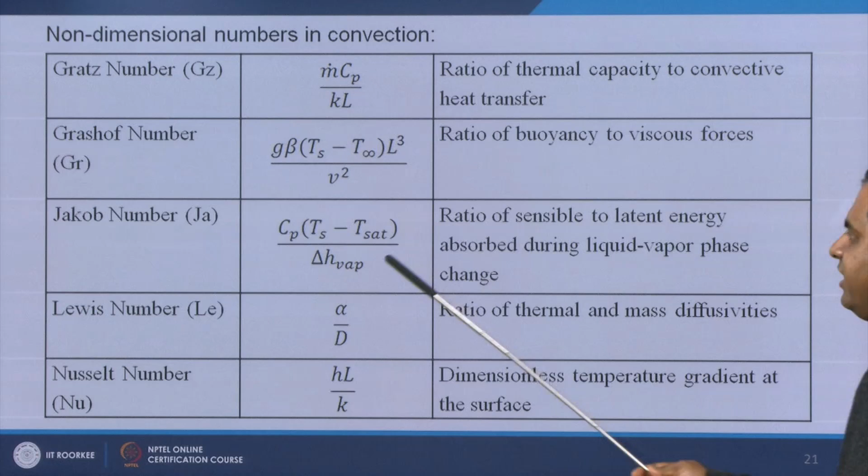Jakob number is Cp into delta T by delta Hfg. This is the latent heat, del H vapor, the ratio of sensible to latent heat absorbed during liquid vapor phase change. This is important for phase change processes.

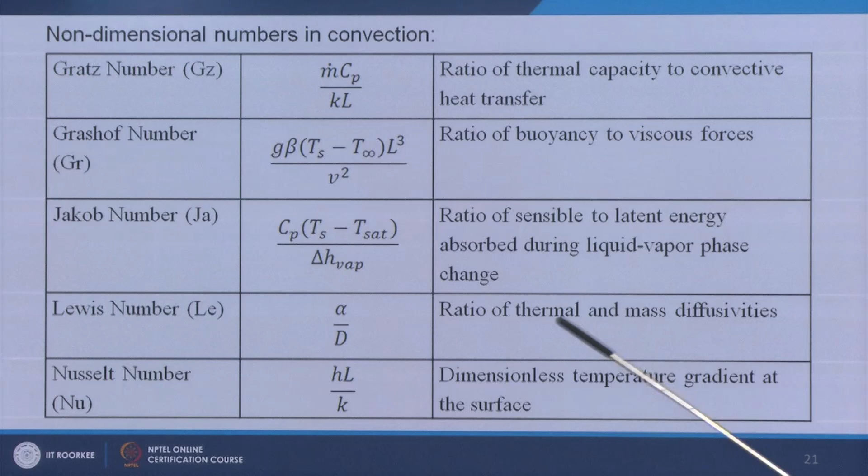Lewis number will be important for mass transfer, alpha by D, where D is the mass diffusivity, the ratio of thermal and mass diffusivity.

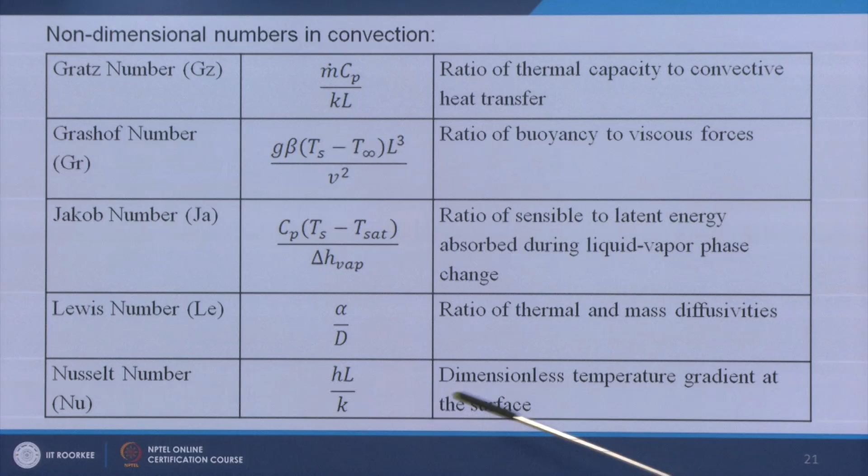Nusselt number will be important everywhere in convection, HL by K. This is the dimensionless temperature gradient at the surface. This has similarity with the Biot number, but Biot number is for solid, here Nusselt number is for the fluid.

Then we are having Peclet number, VL by alpha, a dimensionless independent heat transfer parameter. Then we are having Prandtl number, nu by alpha, ratio of momentum and thermal diffusivity.

Rayleigh number will once again be important for natural convection, it is Grashof number into Prandtl number, so this is once again used for natural convection.

Reynolds number you have already seen in your fluid mechanics course, rho L V by mu, this is the inertia and viscous force ratio.

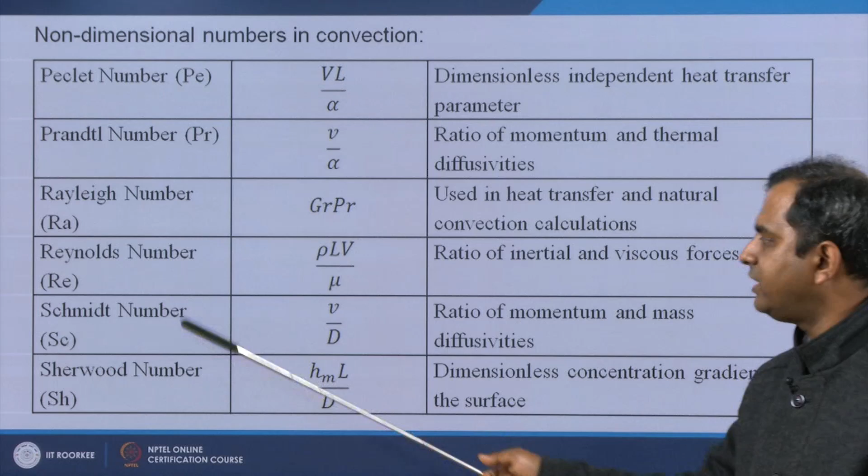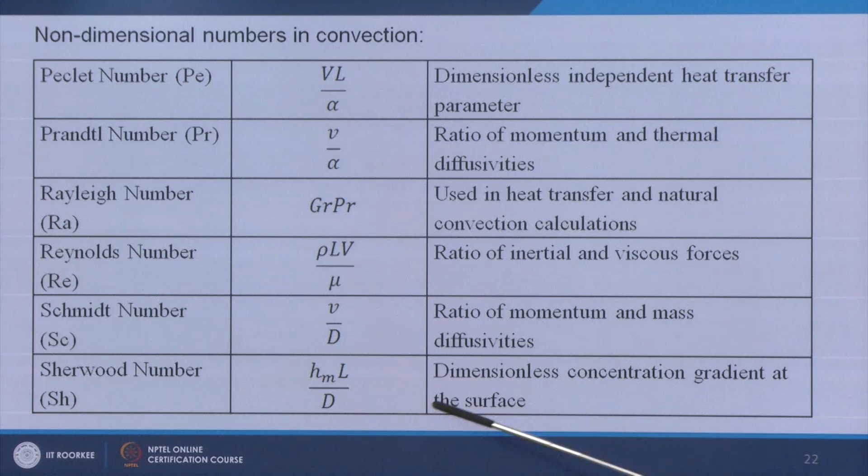Schmidt number and Sherwood number are important for mass transfer. Nu by D is the Schmidt number, the ratio between momentum and mass diffusivities, and Sherwood number is nothing but HmL by D, mass transfer coefficient into L by D, the dimensionless concentration gradient at the surface.

So with this I will be ending this lecture. Let me summarize what we have understood.

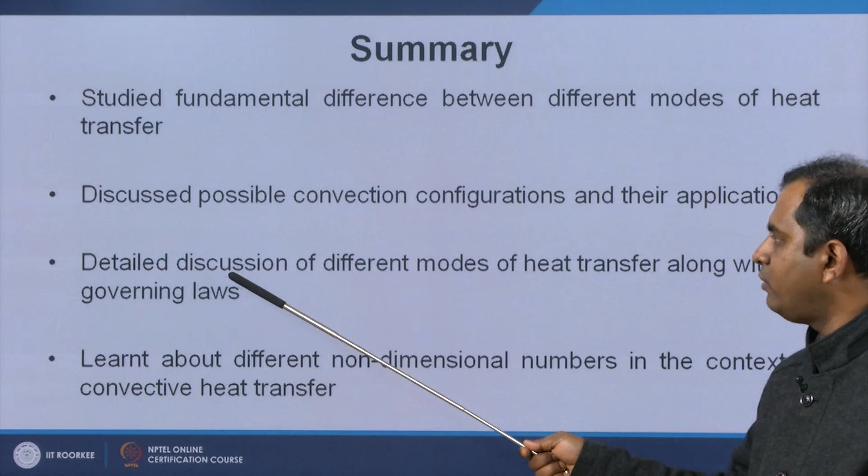We have studied the fundamental difference between different modes of heat transfer. We discussed possible convection configurations and their applications. We had a detailed discussion of different modes of heat transfer along with the governing laws, and we have learned different non-dimensional numbers in the context of convective heat transfer.

Let me now try to test your understanding of what you have learned in this lecture. So first we are having 3 questions.

First question: which of the following is not a single phase mode of heat transfer? You have to figure out this two phase or phase change heat transfer: conduction, convection, radiation and boiling. Obviously the correct answer is boiling.

Next, which law is not applicable for heat transfer? We have Fourier's law, Newton's law of cooling, Newton's law of motion, and Stefan-Boltzmann law. We know that Newton's law of motion is not related to heat transfer, this is related to mechanics, so this is the correct answer.

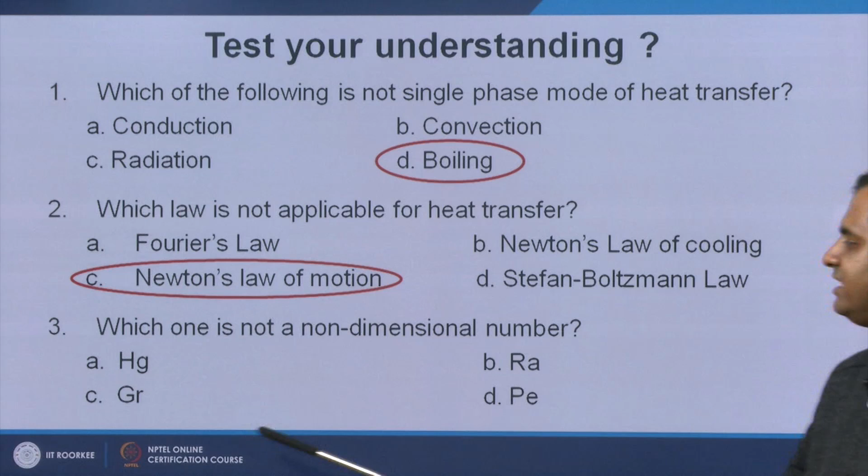Which one is not the non-dimensional number? Hg, Ra, Gr and Pe. We know that Ra is Rayleigh number, Pe is Peclet number, and Gr is Grashof number, but Hg is actually the symbol of mercury. So this is the correct answer, Hg.